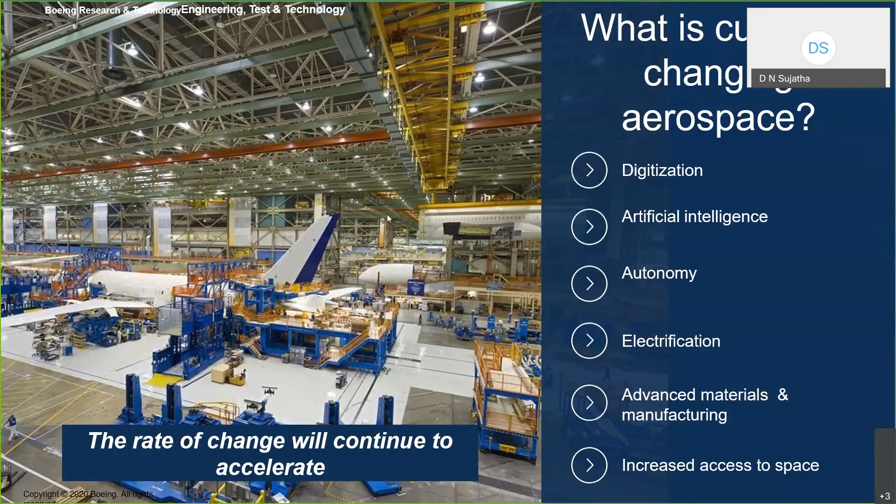So with this, you will need analytic capabilities once you have more and more data to analyze. We will talk about that as well. But this is one example from aircraft, which similarly we have in factories as well.

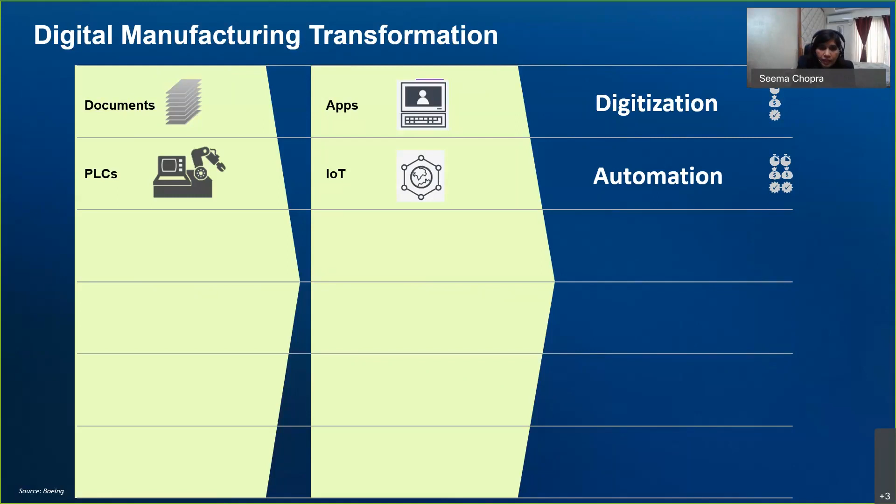Then we have the factory. Earlier we were moving to edge analytics, that's another transformation happening. Then supply chain, we're completely automating that, it will help see how many parts we need and so on. Asset management, then we have discrete simulations, and then comes the digital twin. You see how once we start from there, the benefits keep increasing. If I have a complete digital twin of every flight, I should be able to simulate everything, and from design till today I'll be able to take correct decisions. That will increase the benefit. So that's digital manufacturing transformation.

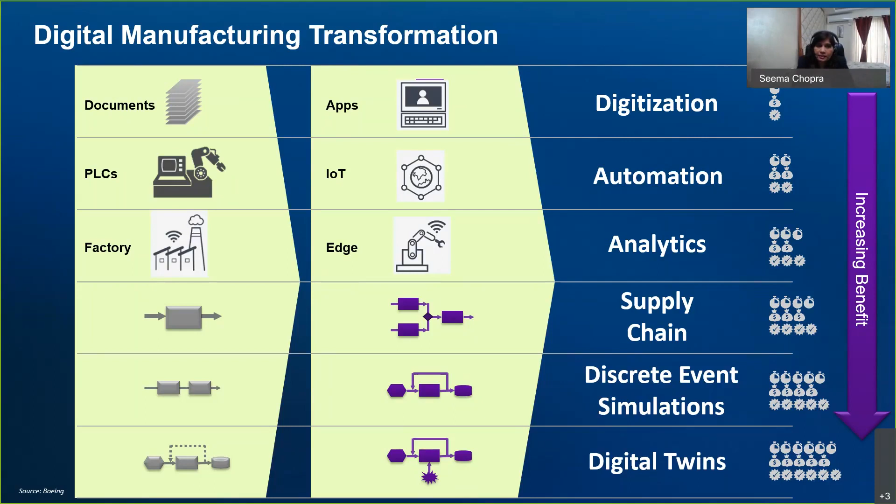Okay, now we have talked about moving from a document era to a digital engineering world, with information flow across the life cycle. So I'd like to show you something.

This is the model-based engineering diamond, I'm sure you must have seen that. This is basically saying when you start from design and then delivery, that is the V, which you must all have seen. This is not from today. The modeling and simulation is basically you model it and simulate it. So that's the diamond, call it model based engineering.

Now I would like to explain you. So this V is about the physical system. If you look at the origin of this iconic system engineering V, it started in the 1980s, 30 to 40 years back, with recognition for the need of system engineering when they were developing complex missile systems.

So they recognized that they really need system engineering. Now this icon covers requirements and the system elements. So if you see from here, this is needs, this is physical system, this is solutions. What it does is it starts from here to solutions, moving from left to right.

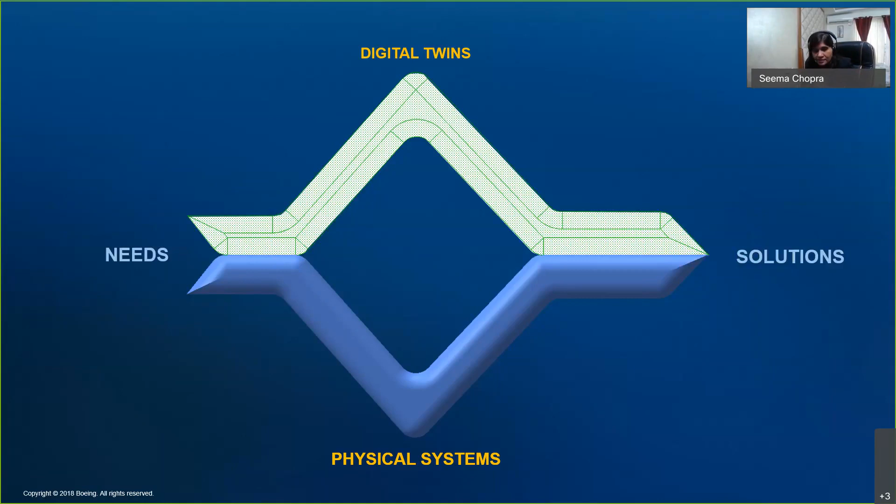It's a mirror image of the physical system on top of it. So both retain the V attributes. The fundamentals behind that are the same, but the new diamond which has come now acknowledges the importance of treating the digital twin as designed, as delivered, as built. Now what is changing is we are trying to create a mirror image on top of the physical system.

So we will have different types of system models, product models, component models, and we will be simulating all that, modeling that. And then at the other side of the V, here we are kind of simulating that. We will have virtual assembly integration, virtual qualification, virtual certification, and the operations, and then it leads to solution.

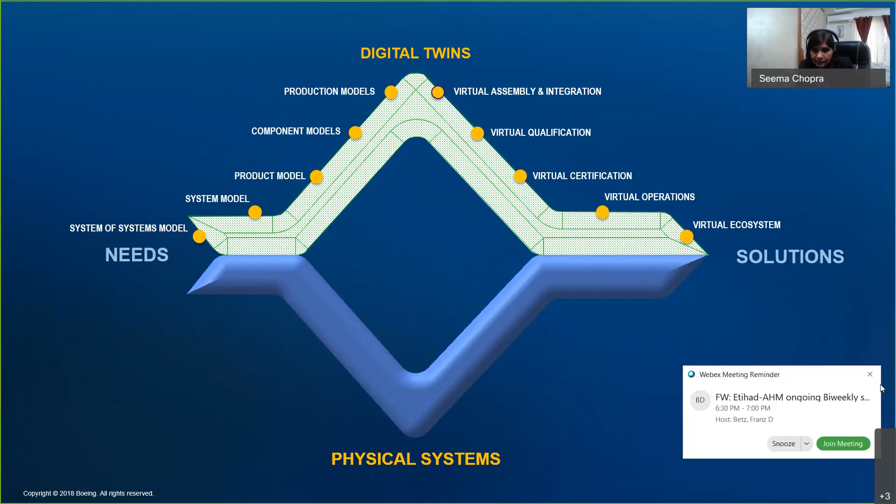So that basically makes the complete diamond. The production models, whatever we build, will have a virtual assembly and integration.

This is complete, as I mentioned, so it is the complete reflection. So needs, when specified, we try to build a model on top of it. We have a component level model, a product model, system models - the whole virtual representation of the physical system we want to build. That's a digital twin.

As planned is the production model. Now I have an imagination, or I know how my virtual product looks like. And when you've planned, you'll be able to see that in the virtual representation as a digital twin.

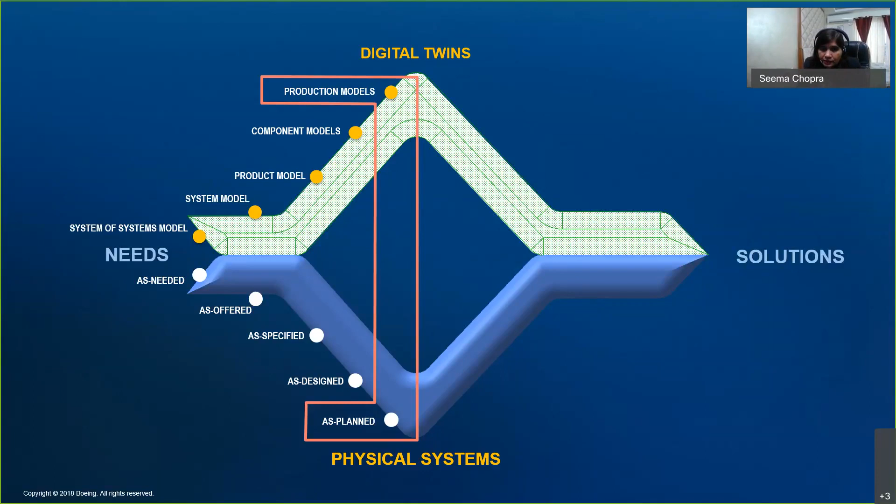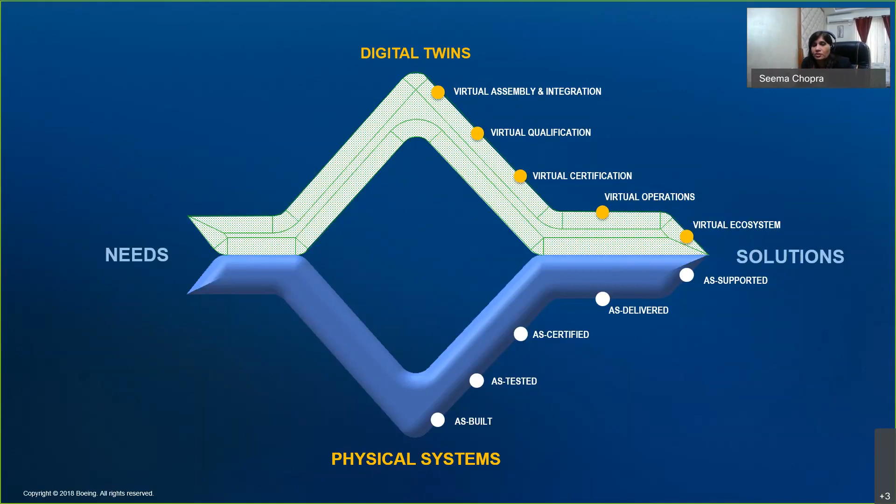Similarly, on the other side, when you have designed, you will build, test, certify, deliver, and support. But the top part allows you to do virtual assembly and integration when building, and virtual qualification when testing and certifying - virtual certification, virtual operations, virtual ecosystem. That's the mirror image of this part, and that's how this diamond gets complete.

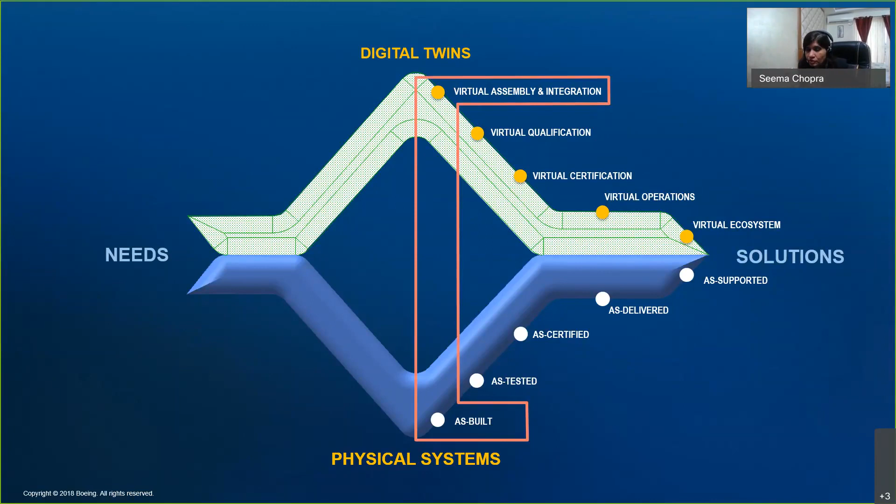And as built, we will have virtual assembly and integration, so there is a connection now. That's what we are moving towards, and this is how the whole diamond looks like.

And if you see the digital thread with the example I started with - how I'm going to connect all the fields like delivery, design, and so on - this is what the digital thread is. I have all the services, from the requirements, everything connected. That's what I mean by digital twin or digital world digitization.

Okay, so are you with me? Does that make sense to all of you? Yes, no? Okay, great, thank you.

So now we have talked about what we initially discussed - what was digital, why we need to connect everything, and then how we are connecting. We talked about how documents are converting into digitization, starting from documentation and then IoT and so many things, how we are connecting. We'll take questions later. So this is how the whole diamond looks like, from needs to solution, from physical system to digital twin.

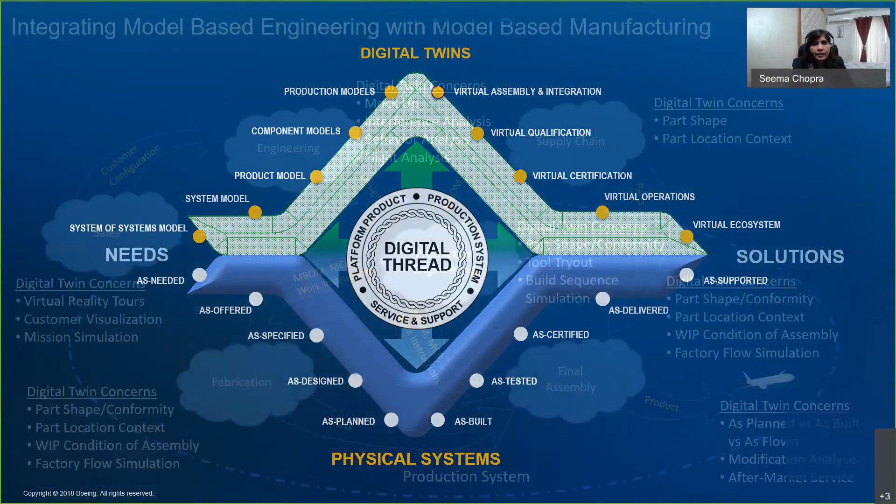Okay, now let's talk about how we are integrating our model-based engineering with model-based manufacturing. We are a manufacturing company, we know that, right? So how are we trying to connect everything.

Okay, so we have around 30 minutes past. Would you like me to take questions, Sujatha, in between? Then I can come to this. Sujatha, are you on mute? Yeah, can you... Sujatha, okay, is not there, and Sadhana. I think if you want, you can take questions now. Okay, I can take questions now because I see lots of questions coming in, in case something related to the topic, you can take one.

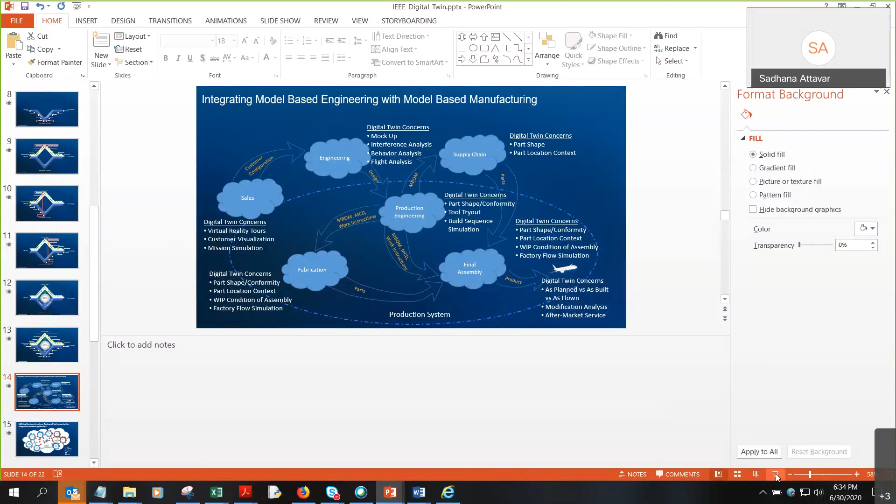Question: How do low cost carriers achieve aircraft turnaround times as low as 45 minutes? Say again - how do low cost carriers achieve aircraft turnaround times as low as 45 minutes?

Oh okay, low cost carrier - when you say small aircrafts, as low as 45 minutes. So I have not touched upon that topic today.

But if you're aware, we have a system called airplane health management in our aircrafts. Airplane health management allows our airlines, our customers, to take all the analytics-based models or subject matter knowledge based models into AHM. When you're flying, it's able to track what's happening, and it can send information to the ground saying this fault has occurred. Once that fault has occurred, we have to make sure, while in flight, that as an engineer I should have that part available, so as soon as you land we can fix it. That's how it helps the domestic or low cost carriers.

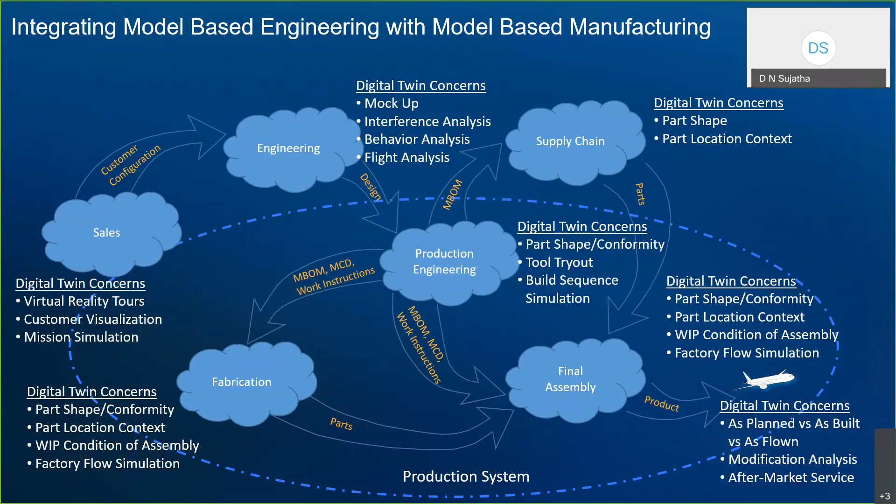So now I was talking about understanding the digital twin. We have integrated model-based engineering with model-based manufacturing. That's what I'm trying to explain to you.

When we are making a digital twin, we have to think of every aspect of it. At sales, we have virtual reality tours. In Seattle, we have a very good virtual reality center where customers come and virtually see their product. There's customer visualization, mission simulations of the whole fleet, how the flight travels from point to point, we simulate all that. That's from the sales side.

Once we have that, the customer configuration goes into engineering. At engineering, we do mock-ups, interference analysis, behavior analysis, and even flight analysis. Once we have that information, we send the design information to production engineering.

We have a production engineering team where the information goes to supply chain, fabrication, and final assembly. From production engineering, we determine what type of parts we need to produce, what shape, how we build the sequence simulation, and so on. We send the information to supply chain.

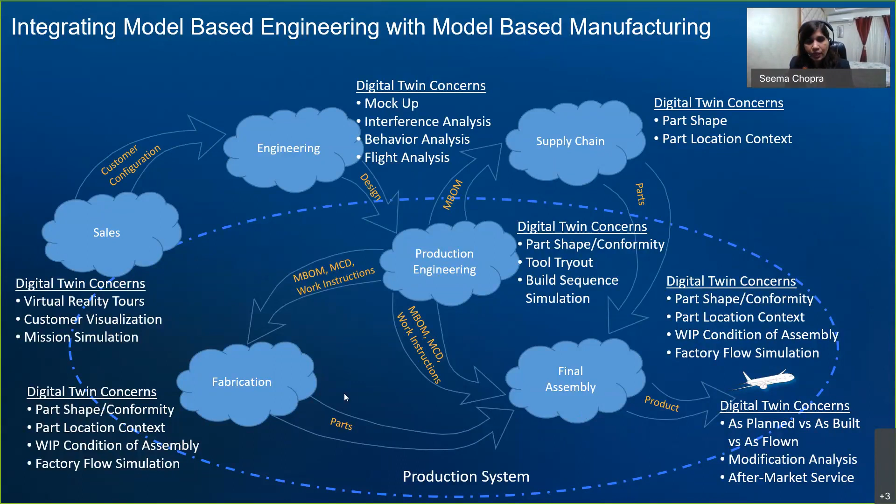As one of you asked, I'd like to touch upon the aftermarket service part. This was during the design phase. Now, from the operation phase, we have to have all the data. When flying, say I have airplane data—all the data gets recorded during flight.

We have navigation data, say how to fly from Bangalore to Chandigarh, or Bangalore to Chennai—there are two ways we navigate that. There's crew scheduling—when you get into the flight, what time the crew will come, which people, all that scheduling. Flight planning, flight decks—flight deck effects—when a fault comes, I should have that information from the history. And maintenance, leasing, and operation management—so much data.

We want to connect all of this even during operations. First was during design, but during operations too, if I have all that information connected, I should be able to do self-service analytics. I'm showing some things already connected in the cloud, and some we are working towards. That's utilizing the cloud structure.

Most of you asked how we store the data. I'm showing you we have not only data from aircraft but different data sets coming in, and we have to have that connected and that information integrated. That's how we are trying to connect everything.

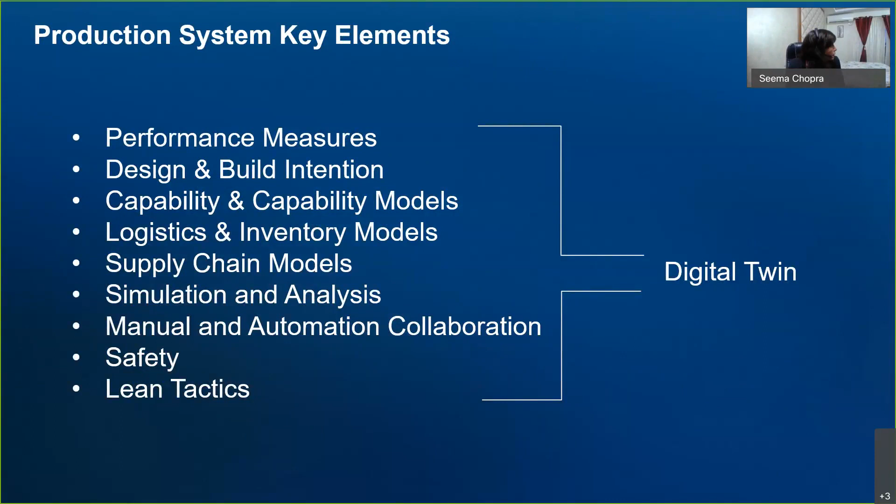Now I just want to show you something here. We talked about digital twin, we talked about the technology and what we are getting out of it. I want to give you some examples. First is artificial intelligence and machine learning advances on the factory floor, and how we are able to manage the factory floor.

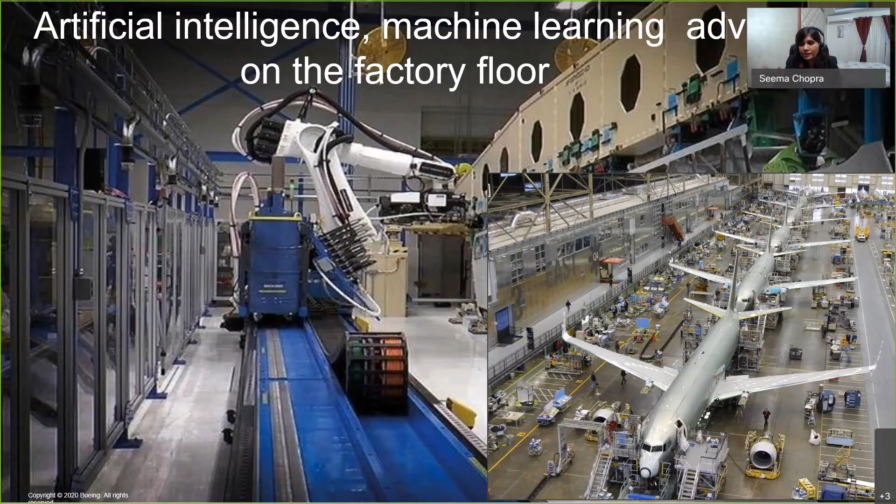I'm not asking questions there, but I wanted to ask here: can you guess how many days it takes to build an aircraft, assemble an aircraft? I'm not talking about building the parts and all, but assembling the aircrafts by the moving line assembly. You can put that in the chat box, think over that, and tell me how much time it will take if I have to make sure one aircraft should be ready to deliver to my customer from the assembly, from the time when I got all the parts and all.

You're thinking too much? No, no. We are very fast. We will not be able to take all the orders if we think of 12 months or so. Yeah, somebody is talking in days now. That's good.

Okay, so this is one of the examples I wanted to give, how artificial intelligence and machine learning are helping us in the factory. We are automating things and managing our space. If you think of our Boeing factory, just do a Google search and see in older days the zigzag assembly, how it was like, there was no space and it was messy. So this is how things are improving.

Now the other part is autonomous inspections, boosting safety and productivity. Generally, if we have to inspect for scheduled inspections when the aircraft comes, I'm not talking about the quick inspection of 2 hours or so, but here it has come for full inspection, and I have to completely inspect it. All the field service guys will go and inspect it.

Once I have those images, I apply image analytics or computer vision to identify if there is damage. That's what I want to do during my inspection. If there is any damage, I apply computer vision and image analytics. That's what we are doing currently, so we will be able to identify if there is a fault, say at the wing or at the fuselage.

Then the next step, and this is a great example of the digital twin we discussed, is now I have that completely automated. Once I feed that information, okay, my damage is say 0.3 inch, just to throw one example, then the next step is: is 0.3 allowed? Can I still fly, or do I need to do some repair here?

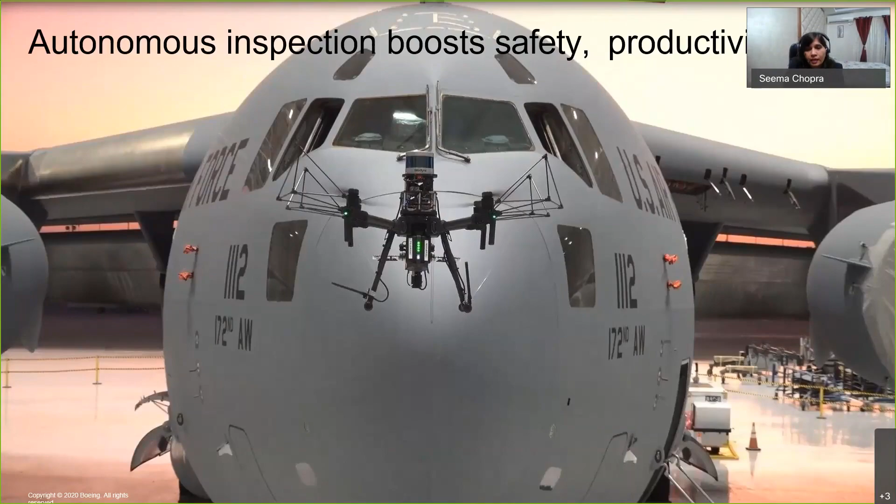Another thing is using the power of data to design the right product. When we are simulating, we are able to see how my product will look. As you know, we don't only work on aircraft, we have our defense area as well. So we will be able to imagine our products and simulate how my product will operate in the field, what will be the optimal design, how can I collaborate on my design, and how will I know my design will work or not. All that we will be able to do by having such a digital space in our world.

Now we will have new ways to solve traditional manufacturing problems, like when can I expect my airplane to be complete? Because I have this many orders, if I have digitized everything, I will be able to see, okay, in this many days my aircraft will be ready. Now, where can I reduce inspection? Say I'm doing inspection, right, like when you go for your car, they say come after 5,000 hours of service and so on. Similarly, we have this in the case of aircraft.

How can I reduce the inspections? Do I really need to, when you go for service of your car, they will say, hey, change the oil, this too, do you really need to do that? You will think, if I avoid this, what will happen? Nobody wants to pay, right? So if it is not required, why should I do that? By doing this, we will be able to see, do we really need inspection now, or are all my parts okay? Where does the tool life begin to affect first pass quality? How can I open up my engineering tolerance, and so on? So many questions we will be able to answer, which are traditional manufacturing problems.